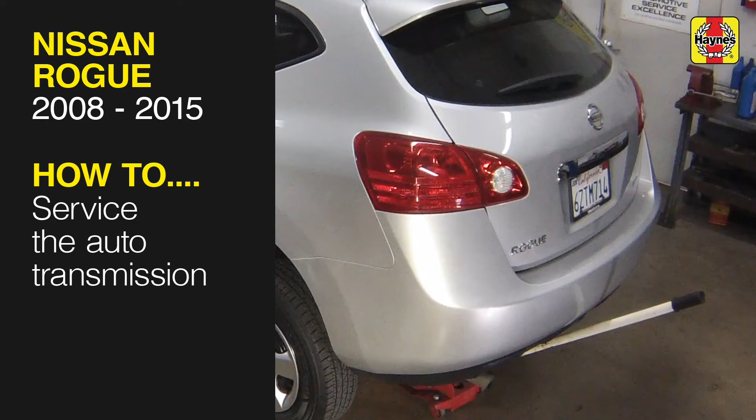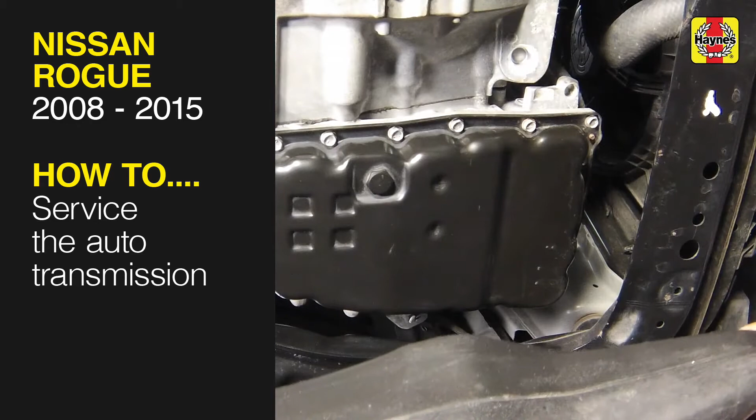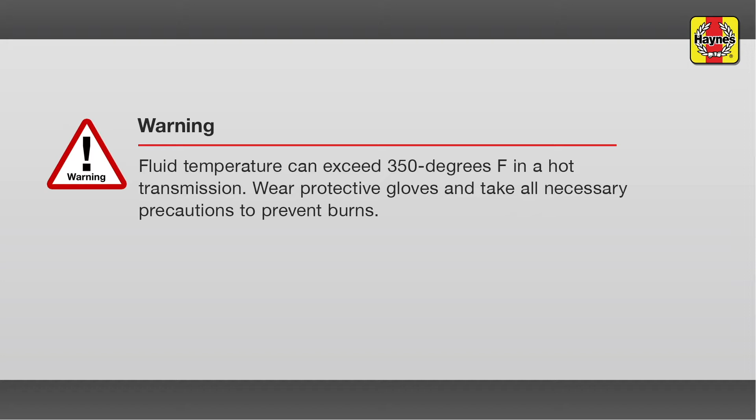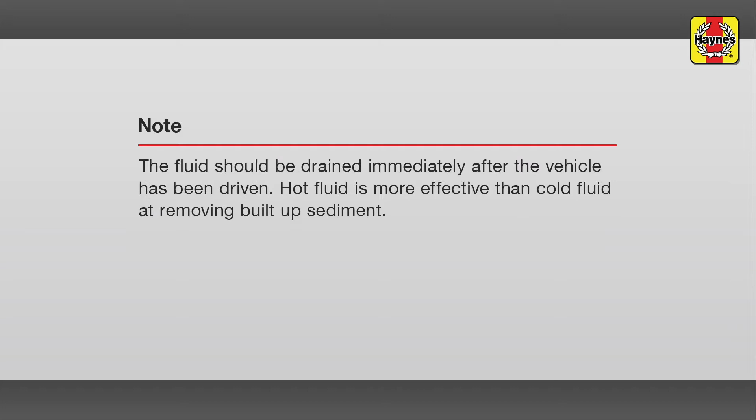Automatic CVT Transaxle Fluid Change. Pull the hood release lever located above the driver's side kick panel. Lift the hood safety latch, then raise the hood upwards.

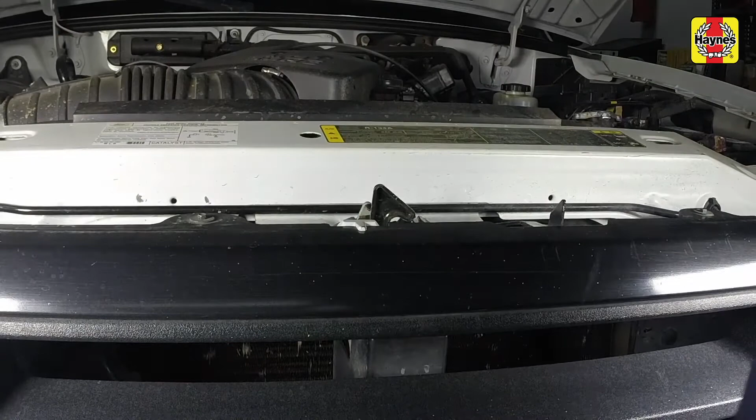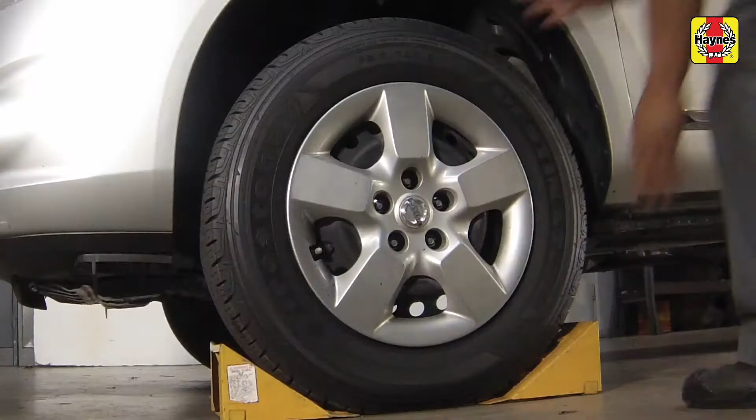After the vehicle has been driven to warm up the fluid, apply the handbrake. Chock the rear wheels to prevent the vehicle from rolling. Then raise the front of the car and support it on jack stands. Then raise the rear of the car and support it on jack stands.

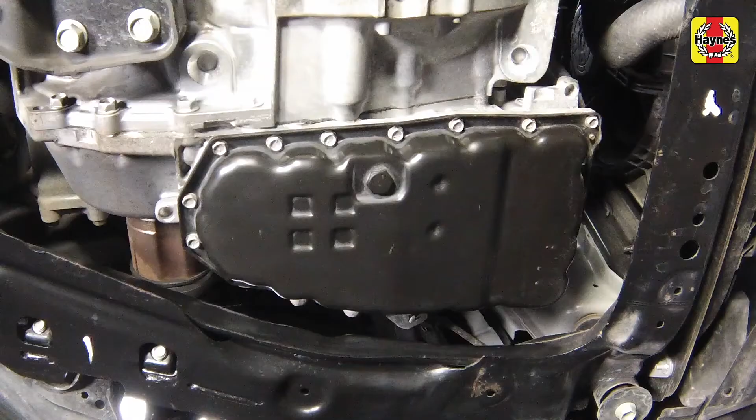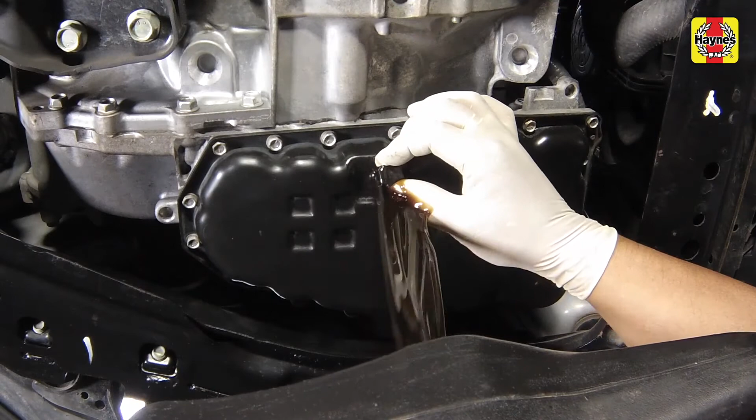Place a drain pan under the transaxle drain plug, then remove the plug. Be sure the drain pan is in position, as fluid will come out with some force. Once the fluid is drained, reinstall the drain plug and tighten it to the specified torque setting.

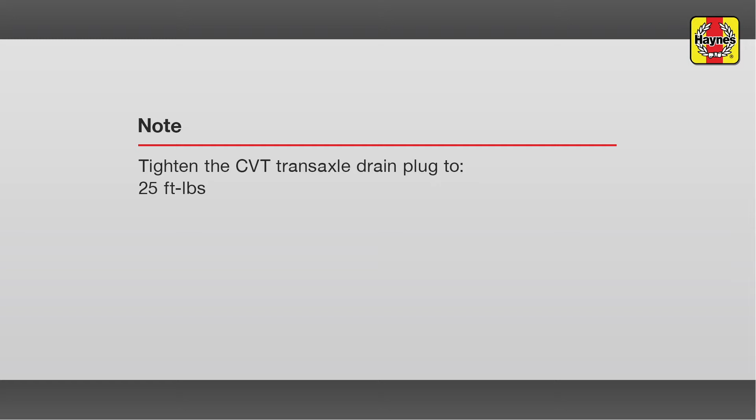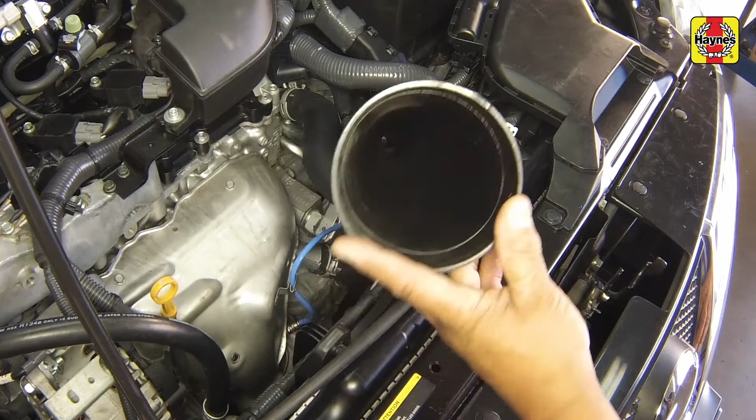With the engine off, remove the transaxle dipstick and add the correct type of new fluid to the CVT transaxle through the dipstick tube, using a funnel to prevent spills. It is best to add a little fluid at a time, checking the level with the dipstick. Allow the fluid time to drain into the pan.

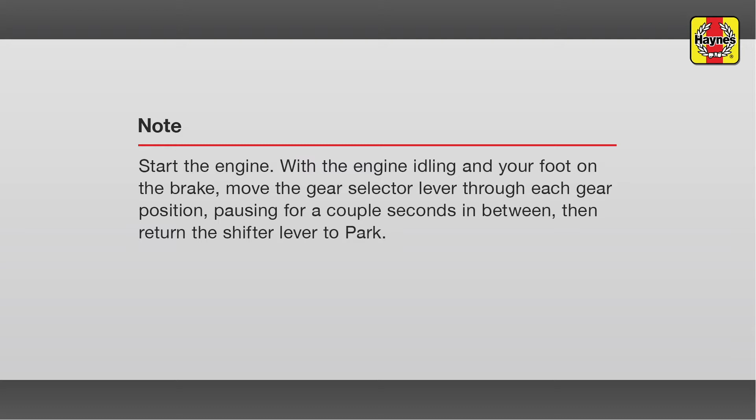With the engine idling, wipe off the dipstick with a clean rag, then push it all the way into the tube until the cap seats. Pull the dipstick out again and note the fluid level.

Add fluid a little at a time until it's up to the cool level mark on the dipstick. As the vehicle is driven, the fluid level will rise closer to the upper mark. Once the fluid level is correct, insert the dipstick fully into the tube until it locks.